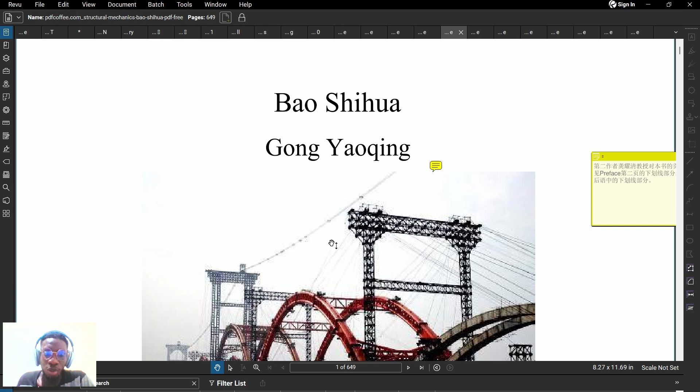Anyway, this is Structural Mechanics by Bao Shihua and Gong Yaoqing, from Wuhan University of Technology. I think this is where COVID originated from, from the Wuhan Labs.

Anyway, not going into these things, they don't concern me. I don't understand Chinese.

This is my first recording of this book. I'm actually planning to record the whole of this book. It's around 649 pages, so I don't know how many days, weeks, months, or years it will take, but who knows?

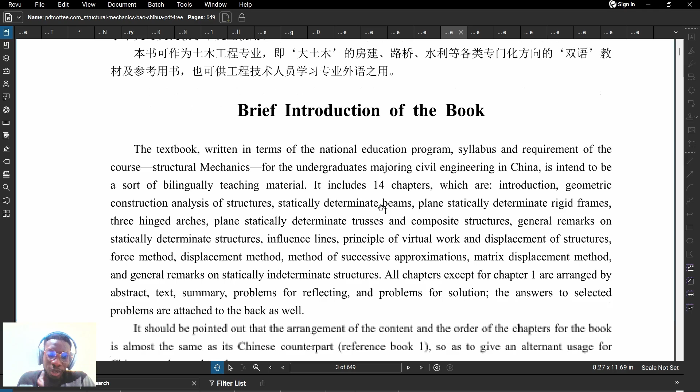I think this will be okay. Now let me read through the text. The book is arranged to include 14 chapters: an introduction, geometrically deterministic structures, statically determinate beams, plane statically determinate rigid frames, three-hinged arches, plane statically determinate trusses and composite structures, general remarks on statically determinate structures, influence lines, principle of virtual work and displacement of structures, force method, Hardy Cross method of successive approximations, matrix displacement method, and general remarks on statically indeterminate structures.

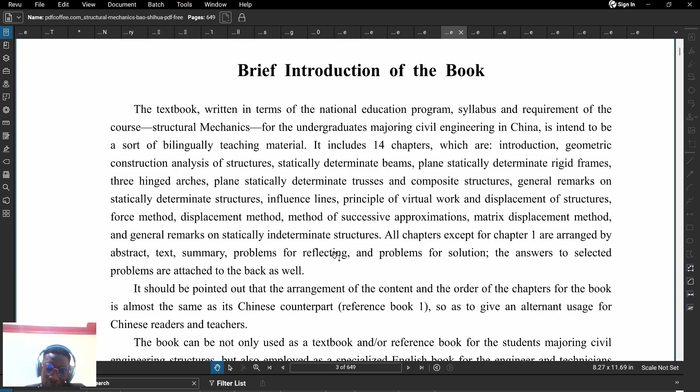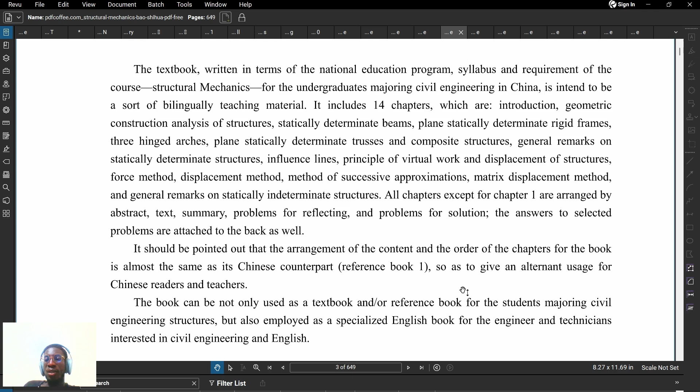Okay, there's another book in Chinese, but this one is for English, of course. I can't read Chinese, so I have to choose English. You may wonder why, of course. Can you read Chinese? No, I can't.

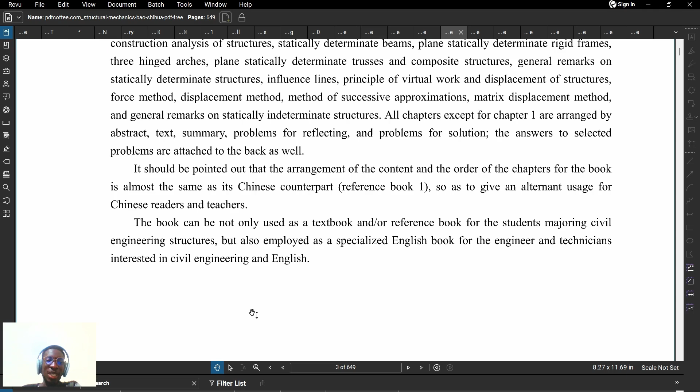So it has to give an alternative usage for Chinese readers and teachers. The book can be used not only as a textbook or reference book for students studying civil structures, but also as a specialized English book for engineering application. Interesting, this guy has written a book to teach Chinese engineers English without them losing time, like you're learning English at the same time as learning structural engineering. Interesting.

So the preface says background: when time reached the 21st century, strong pressures developed from many ranks to write a book of structural mechanics in English for Chinese undergraduates majoring in civil engineering specialty.

The naissance of the book is the result of a request from Wuhan University of Technology Press, a press in China. In recent years, the manner of teaching technical courses in English or partially in English is strongly promoted by the Chinese Ministry of Education.

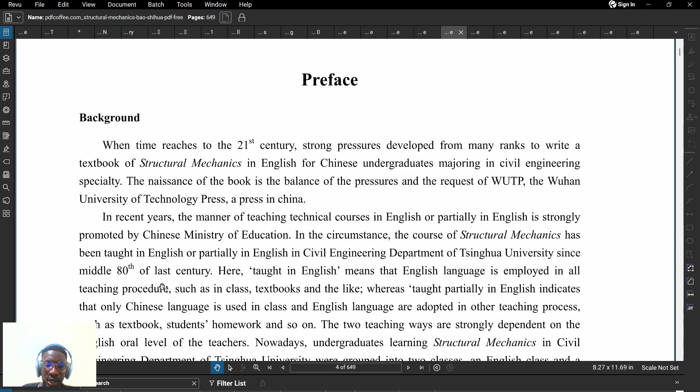In these circumstances, the course of structural mechanics has been taught in English or partially in English in the department at Tsinghua University since the middle 80s of the last century.

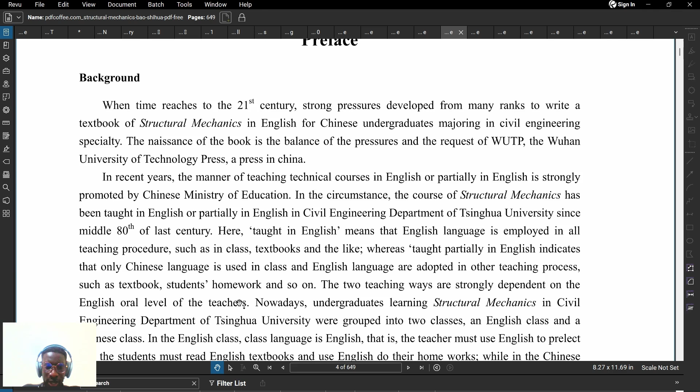Here, taught in English means that English language is employed in all teaching procedures, such as in class, textbooks, and the like. Whereas taught partially in English indicates that Chinese language is used in class, and English language is adopted in other teaching processes such as textbooks, students' homework, and so on.

The two teaching ways are strongly dependent on the English level of the teachers. Nowadays, undergraduates learning structural mechanics in the civil engineering department of Tsinghua University were grouped into two classes, an English class and a Chinese class.

In the English class, the class language is English. That is, the teacher must use English to lecture, the student must read English textbooks and use English for their homework. While in Chinese class, the class language is Chinese. The two teaching ways have been normalized into the teaching plan of Tsinghua University.

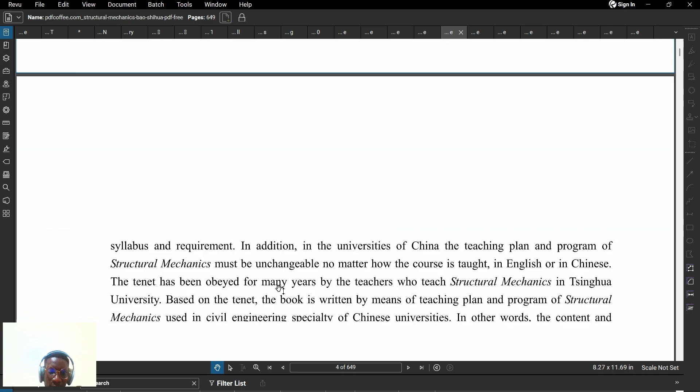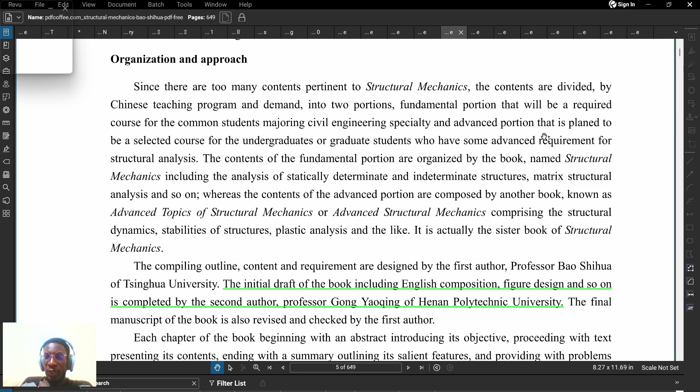So I think I can skip organization, I don't think this is helpful for me, since I'm going to read the whole book from beginning to end. Yeah, that's the commitment. Then how long... that's contract, no. I don't know if you'll still be around by that time. Of course not, today I'm not finishing today. Okay, so let me go to chapter 1. I want to read it from the start to the end.

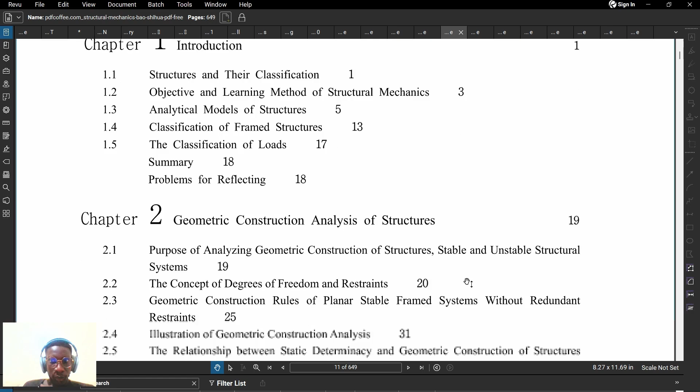Let's take a time, okay. So this is the table of contents.

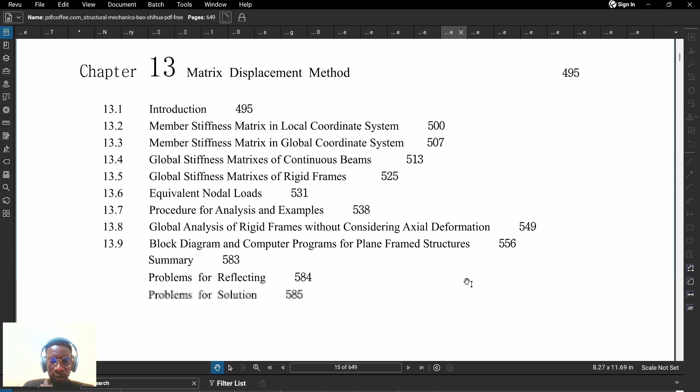Chapter 1, abstract of the chapter. The chapter will introduce 4 questions such as the objective and learning method of structural mechanics, the analytical models of structures, the classification of framed structures and loads. Among the 4 questions, the analytical models are the most significant since they lay the foundation with the other chapters of the book.

Let me get some water. Very thirsty.

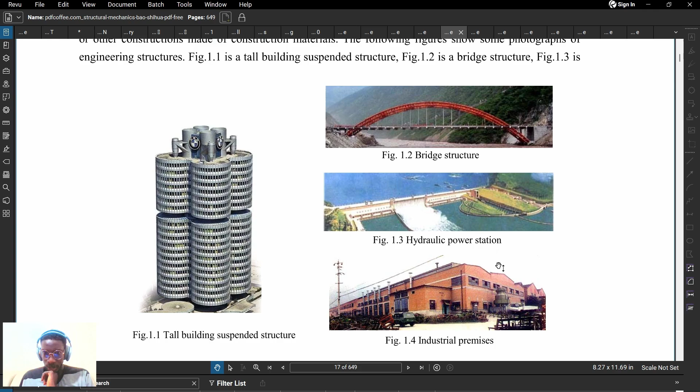Structures and their classifications, okay. These pictures, so tall building suspended structure. Don't know what you mean. Tall building, I know, I work in high-rise buildings. Suspended, I'm not so sure what you are meaning. Bridge, this one I know, bridge structure. Hydraulic power station, yeah, I'm an engineer, electrical to be specific, but I also do mechanical and farming. Industrial premises, this one I never worked in a factory, but this structure, say this chapter.

Structures and their classifications in civil engineering projects. The generic term engineering structure, or briefly named structure, is referred to as a frame or skeleton used to carry loads applied on it. So here they say a structure is referred to as a frame or skeleton if it's used to carry applied loads on it, composed of members of building, other construction materials, performing features and properties of engineering structures.

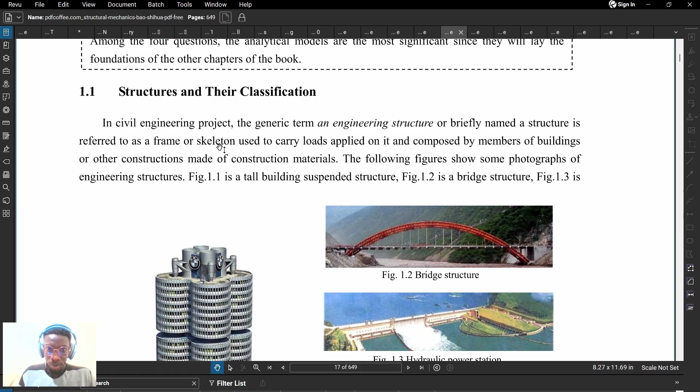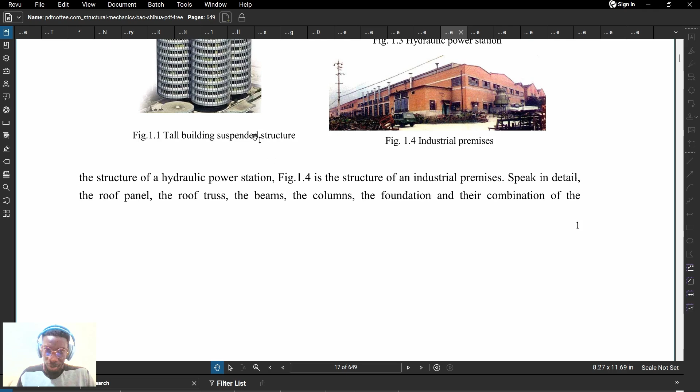A tall building, suspended structure, bridge structure, okay. The structure of a hydraulic power station, figure 1.4. This one is located in industry premises. Speak in detail with the roof panel, roof truss, the beam, the columns, the foundation and their combination, and the combination of one-story workshop with a function of figure 1.8.

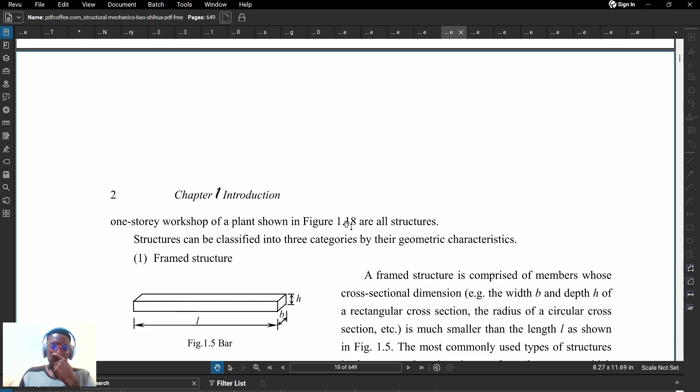Structures can be classified into three categories by their geometric characteristics. What does this mean? If I remember, the definition of structure is just a framework or skeleton, which is used to carry applied loads. It consists of constructions made of construction materials.

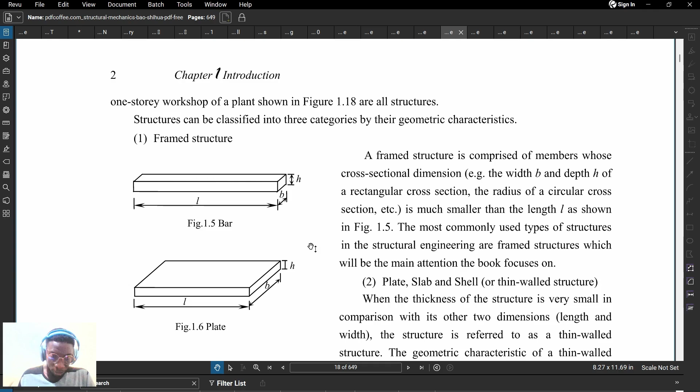So this is a bar, a plate. Okay, a frame structure is composed of members whose cross-sectional dimensions, that is B and depth H of a rectangular cross-section, the radius of cross-section, is much smaller. I think they are taking off from the structure, is much less than the length, as shown in figure 1.5. Okay, so this would be the section, so much less, okay.

So there's some music in the background. My corner, keep quiet, I think you can hear something. Yeah.

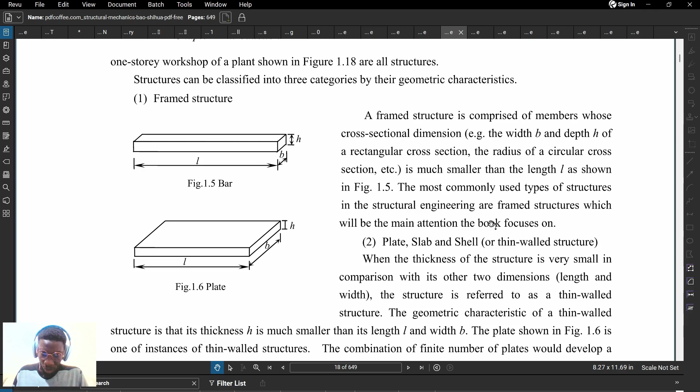So the most commonly used types of structures in structural engineering are frame structures, which remain the main attention, the book focuses on. Okay, two: plate slab and shell, or thin walled structure. Plates, what do we mean by thin wall? When the thickness of the structure is very minimal in comparison to its other two dimensions, length and width, the structure is referred to as a thin walled structure. The geometrical characteristic of the thin walled structure is that its thickness H is much smaller than its length L and width B. Okay, the plate shown in figure 1.6 is one of the instances of thin walled structures.

A combination of a finite number of plates would develop a folded plate, shown in figure 1.7. Folded plate structure, okay.

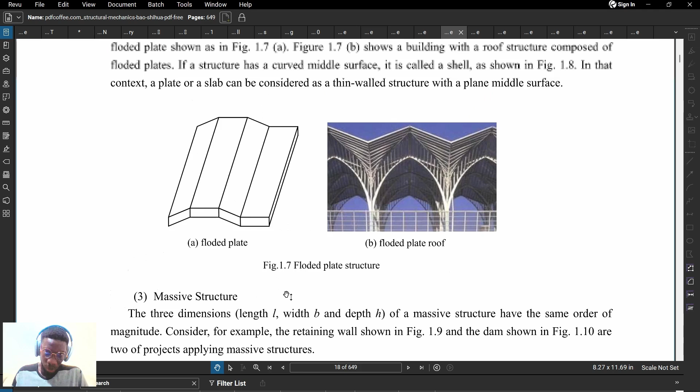If a structure has a curved... figure 1.7, this shows a building with a structure composed of folded plates.

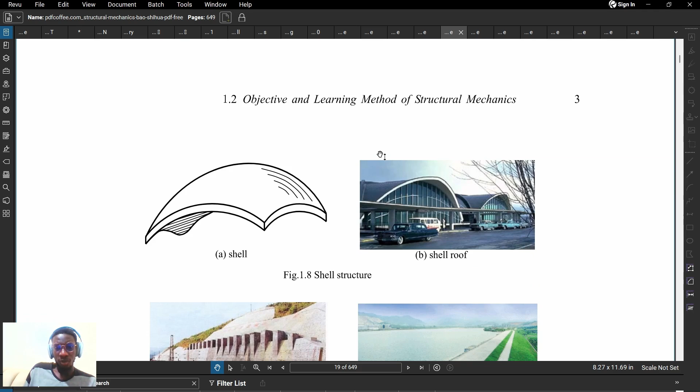If a structure has a curved middle surface, it's called a shell. What do they mean, structure with a curved middle surface? And figure 1.8. Oh, good.

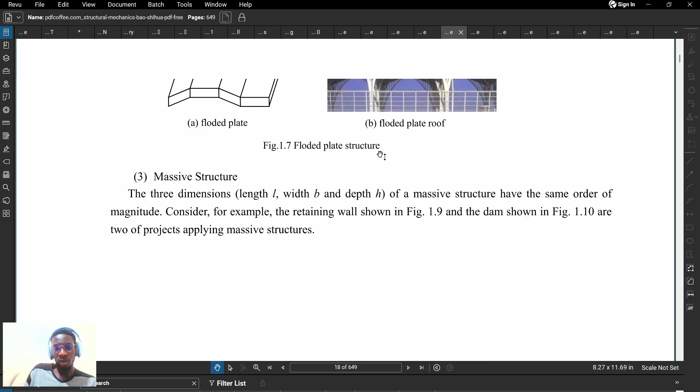In that context, a plate or slab can be considered a thin walled structure with a plane middle surface. Plane, by mean flat.

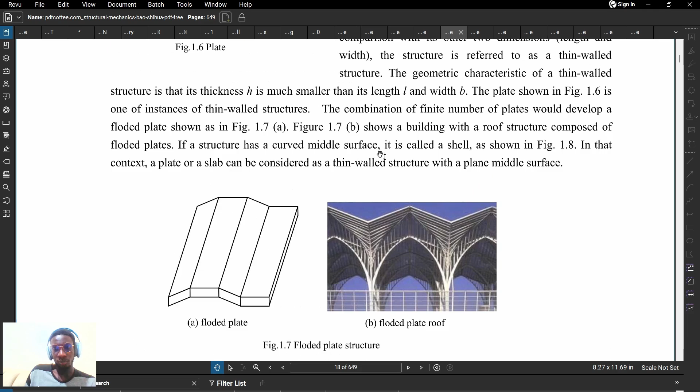Massive structure: the three dimensions, length L, width B, and depth H, of a massive structure have the same order of magnitude. Consider, for example, the retaining wall.

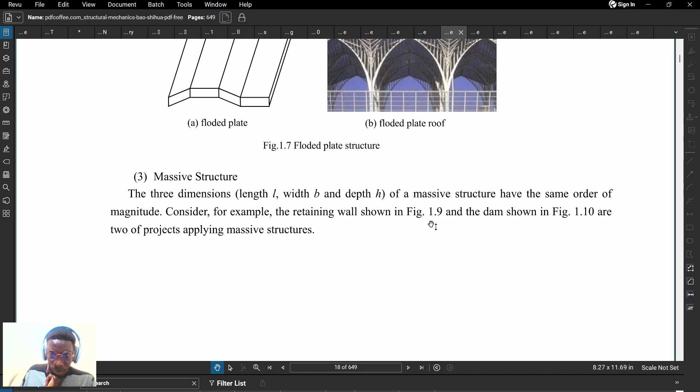Oh, so what I'm understanding, what are you describing? So far we have seen three types of structures. The first is...

The framed structure: the width B and the depth H are very much smaller compared to the length of the overall structure. So that constitutes the beam or framed structure.

Then from that we have plate, or slab, or folded structure. Here, the depth is very much smaller compared to the width and the length. So those are like plate slabs.

Then we have massive structures where all the dimensions are comparable. The author is giving an example of a retaining wall.

But now I have a question. When I'm working, we are constructing a building and we have a raft, the raft foundation. The depth is actually 1 meter, but the length and width are so big.

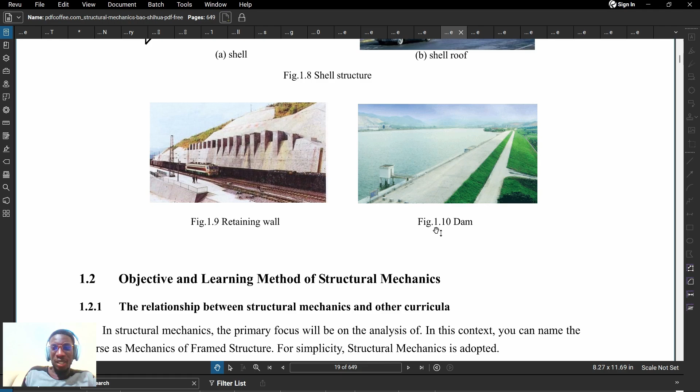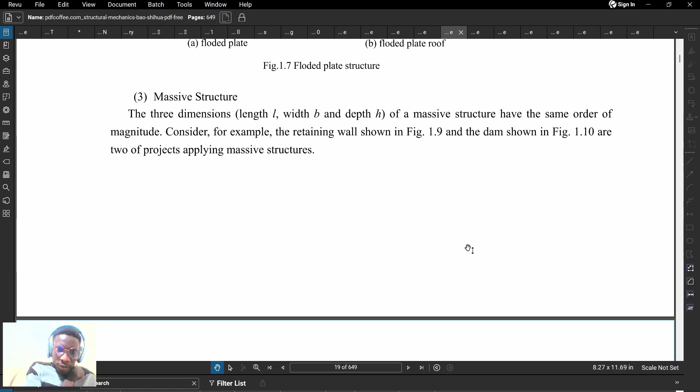Three dimensions, length L, width B, and H for a massive structure are of the same order of magnitude. Consider, for example, the retaining wall.

No, we're going to compare this and that.

Objective learning method for structure mechanics. The relationship between structure mechanics and other curricula in structure mechanics.

Structure mechanics primarily focuses on the analysis of frame structures. So we are going to study mechanics of beams, because a frame structure treated as a beam, where the length is much greater compared to the width and the depth.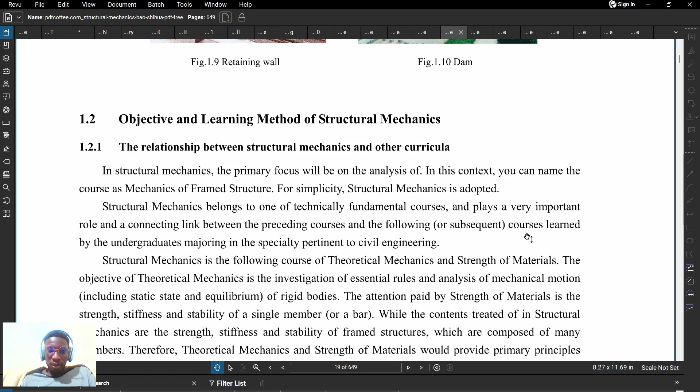For simplicity, Structural Mechanics is adopted. Structure mechanics belongs to the technically fundamental courses and plays a very important role in linking the preceding courses and the subsequent courses learned by undergraduates majoring in civil engineering.

Structure mechanics is the following course of theoretical mechanics and strength of materials. The objective of theoretical mechanics is the investigation of essential rules and analysis of mechanical motion, including static state and equilibrium of rigid bodies.

The attention paid by strength of materials is the strength, stiffness, and stability of a single member or bar.

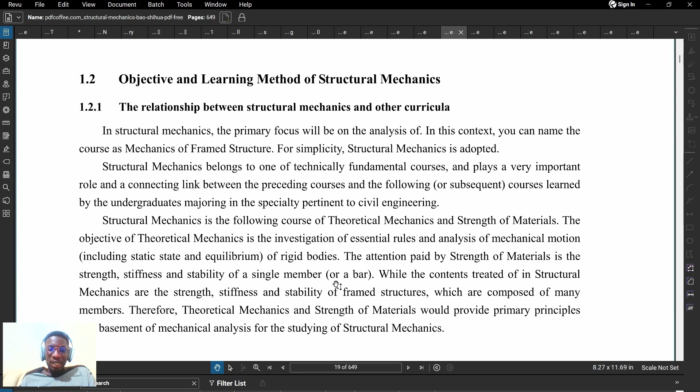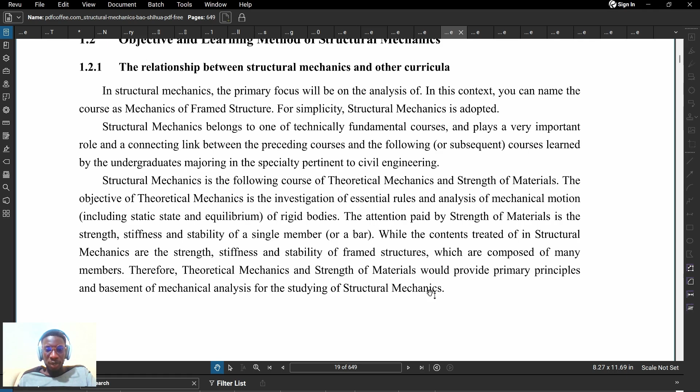While the content treated by structure mechanics is the strength, stiffness, and stability of framed structures, which are composed of many members. Therefore, theoretical mechanics and strength of materials provide the primary principles and basic methods of mechanical analysis for structure mechanics.

Structure mechanics is meanwhile the preceding course for field analysis, focusing on strength, stiffness, and stability of plate, shell, and massive structures—reinforced concrete design, masonry structures, steel structure, and other specialized curricula associated with building construction, structural engineering, highway engineering, bridge engineering, water conservancy engineering, and underground engineering.

By this token, structure mechanics will provide basic mechanical knowledge for studying subsequent courses and play a very important role in the specialty pertinent to civil engineering.

I'm thinking, but I don't think anyone is here by this time. We are 25 minutes in, but if you are, I think that is interesting. I'm thinking maybe I don't have the courage to read aloud. Just giving sincere thought to what else I say, but not everything, because I know if you are here this long, then definitely you can write.

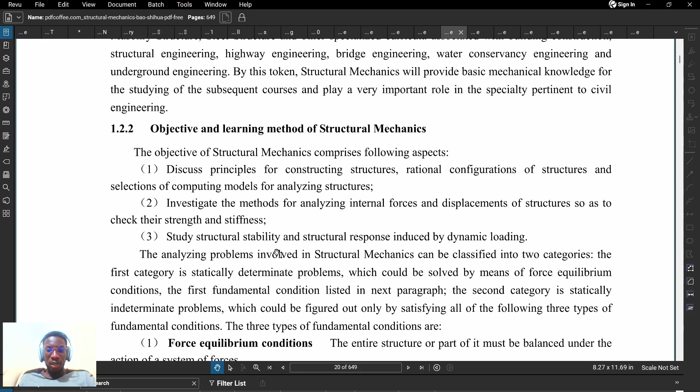The analyzing problems involving structure mechanics can be classified into two categories. The first category is statically determinate problems, which will be solved by means of equilibrium conditions.

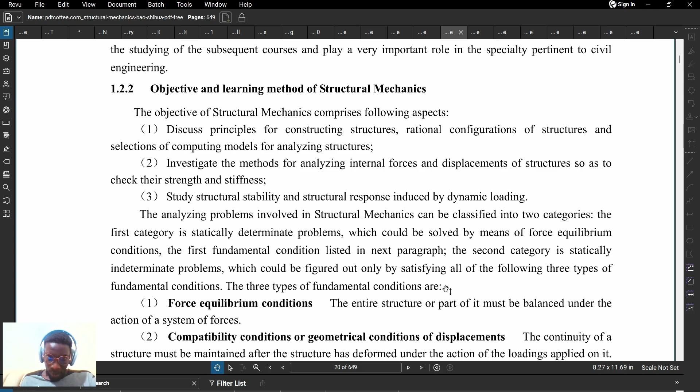The second category is statically indeterminate problems, which will be figured out only by satisfying all of the three types of fundamental conditions. The three types are: first, force equilibrium conditions—the entire structure or part of it must be balanced under the action of a system of forces. Does it make sense?

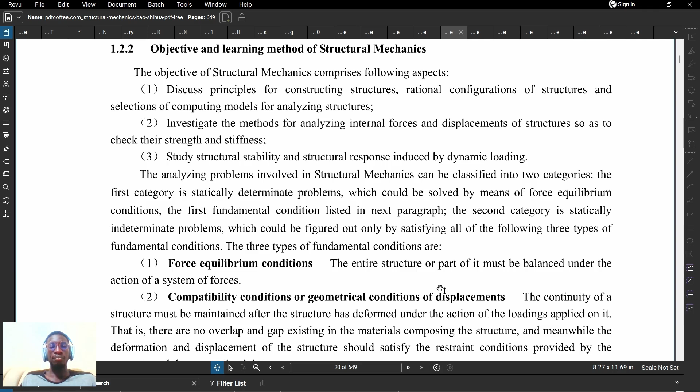Compatibility conditions or geometrical conditions of displacements. The continuity of a structure must be maintained after the structure has deformed.

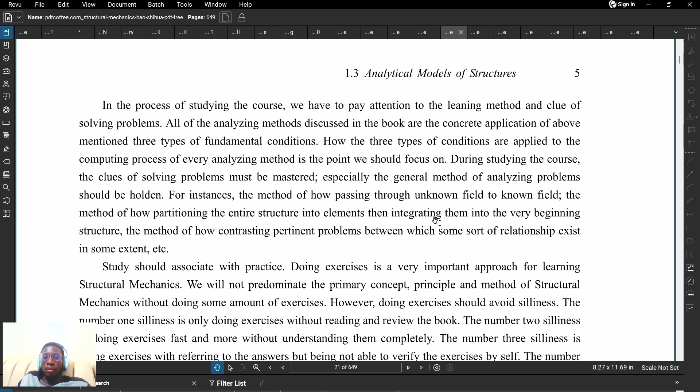Study should associate with practice. Doing exercise is a very important approach for learning structure mechanics.

We will not predominate the primary concept, principle, and method of structure mechanics without doing some amount of exercise.

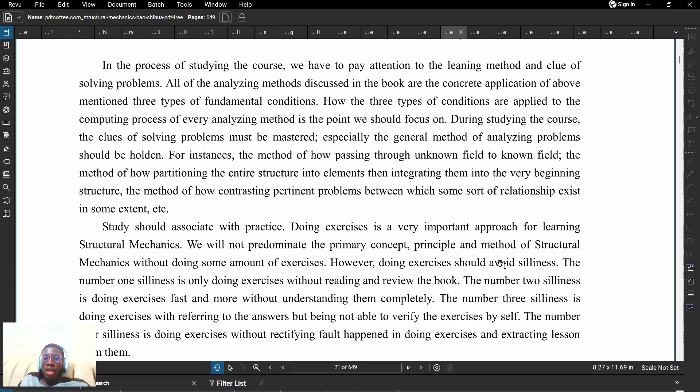However, doing exercise should avoid silliness. This is why I went back to read the whole paragraph because of the word silliness. The number one silliness is when we do exercises without reading and reviewing the book.

The number two silliness is doing exercises fast, without understanding them completely. Number three silliness is doing exercises by referring to the answers but not being able to verify them by oneself. Number four silliness is doing exercises without rectifying fault patterns. This is an instructive method.

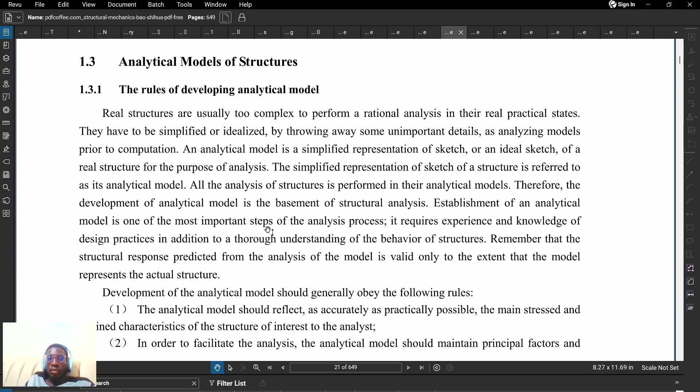So here they are saying real structures are too complex to perform rational analysis in their real practical states. They have to be simplified or idealized by throwing away some unimportant details, leading to models prior to computation. An analytical model is a simplified representation, or an idealized sketch, of a real structure for the purpose of analysis.

All analysis of structures is performed on analytical models. Therefore, the development of an analytical model is the basis of structure analysis. Establishment of an analytical model is one of the most important steps of the analysis process.

It requires experience and knowledge of design practices, in addition to a thorough understanding of the behavior of structures. Remember that the structural response predicted from analysis of a model is valid only to the extent that the model represents the actual structure.

Analytical models should reflect as accurately as practically possible the main stressed and strained characteristics of the structure of interest to the analyst. Okay, the analytical model should - how would we call it?

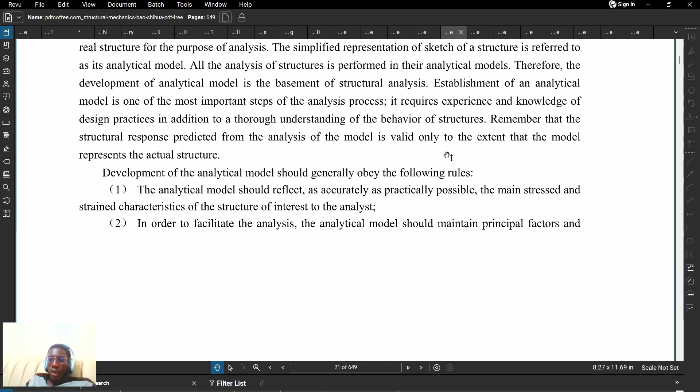In order to facilitate the analysis, the analytical model should maintain principal factors and discard much of the detail about the main structure.

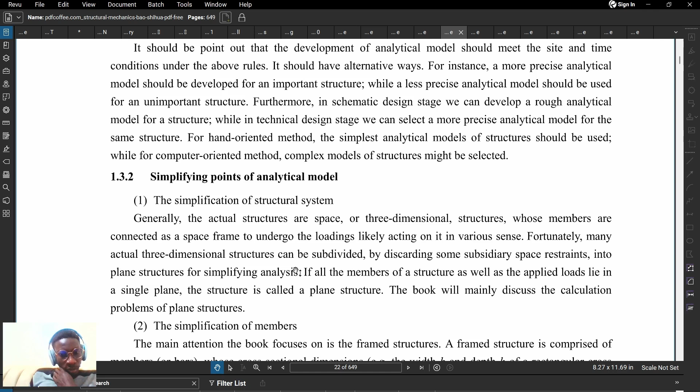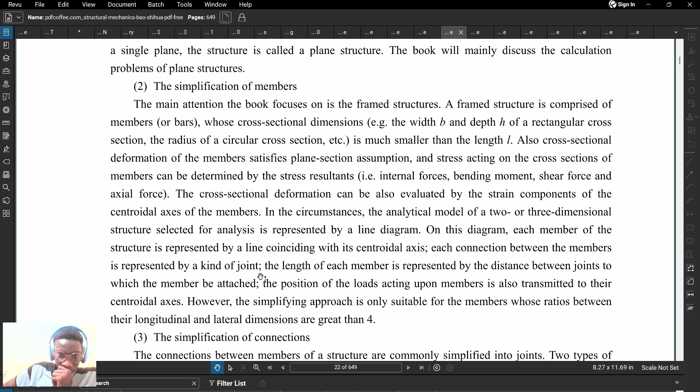Okay, there's some misinformation being shared here. So it's saying...

The cross-sectional deformation can also be evaluated by the strain components of the centroidal axis of the members. In the circumstances, the model of a 2 or 3-dimensional structure selected for analysis is represented by a line diagram. On this diagram...

Each member of the structure is represented by a line coinciding with its centroidal axis. Each connection between the members is represented by a kind of joint. The length of each member is represented by the distance between the two joints to which the member is attached. The position of the loads acting upon them is also transmitted to their centroidal axis.

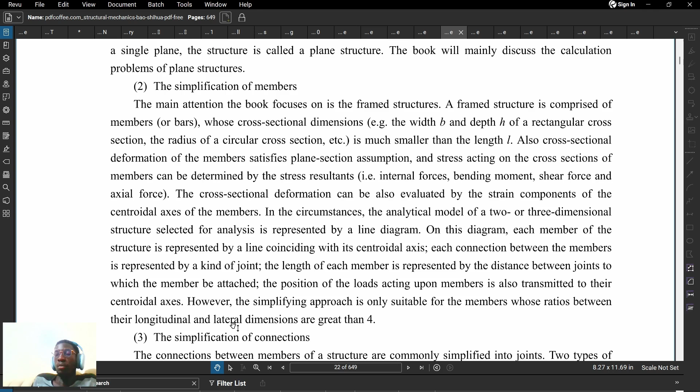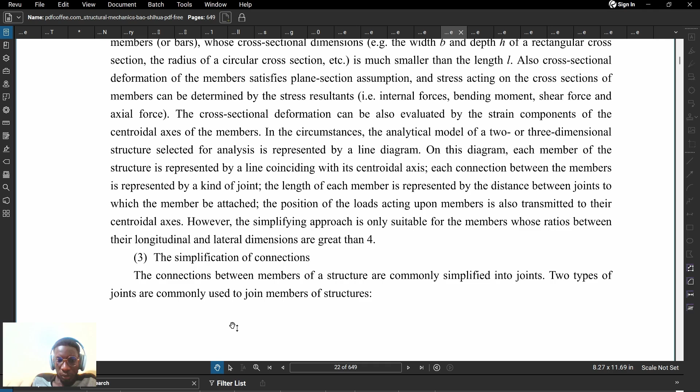So we have two types of joint. We have rigid and hinged, or flexible. There's another one, pin. Yes, there's also pin, there's also roller. But here they're saying the two main ones are actually flexible. Oh, I think pin is the same as hinged. Yeah, so there are three: pin, hinged, or flexible - that's one - then rigid, and then roller.

So here it's saying a hinged joint prevents relative translations of the member ends connected to it. That is, all member ends connected to this joint have the same translations, but may have different rotations.

Translation is like... I think turning on its own axis. No, actually translation is moving from one place to another. Yeah, rotation is just turning on your own axis - remain in the same place, but you turn. Yeah.

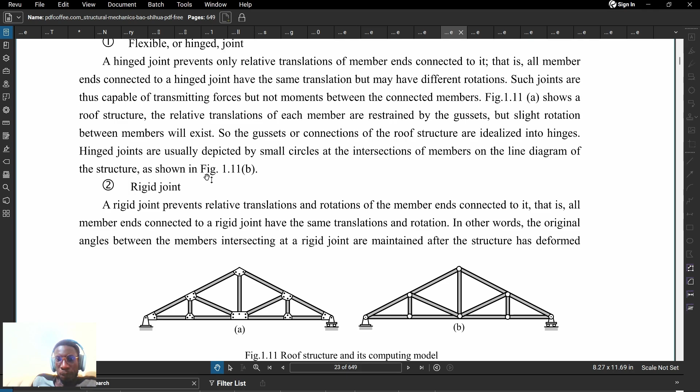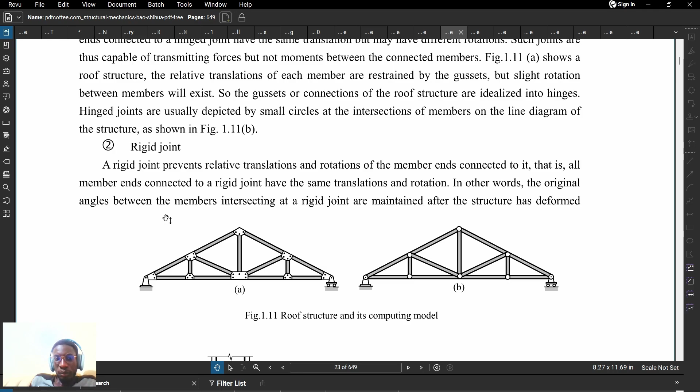For rigid joints, it prevents relative translation and rotation of the member ends connected to it. That is, all member ends connected to a rigid joint have the same translations and rotations.

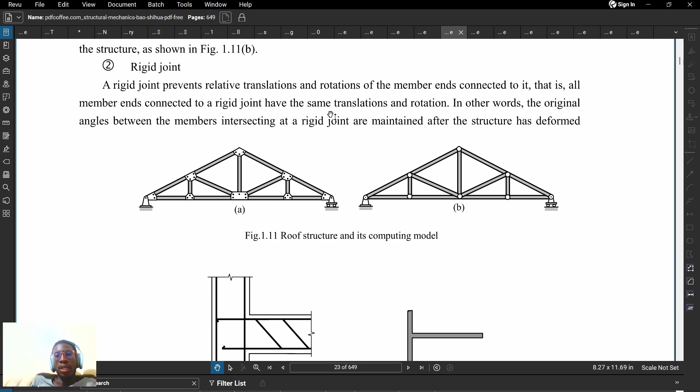In other words, the original angles between the members intersecting at a rigid joint are maintained.

So they say, figure 1.12 shows the connection of a reinforced concrete side column and beam.

The relative translation and rotation of the beam, column and beam are restricted by the arrangement of reinforcements which are cast into the whole body.

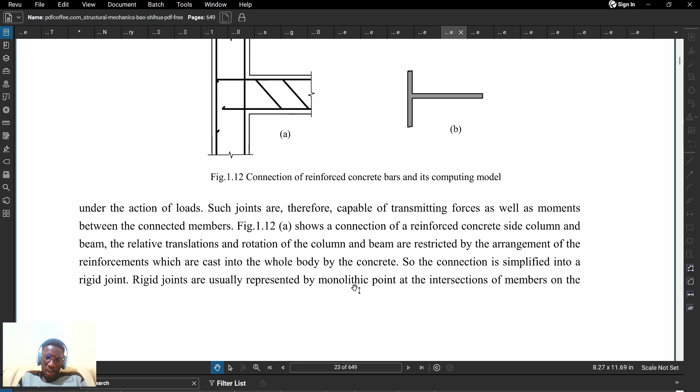By the concrete, so the connection is simplified into a rigid joint. Rigid joints are usually represented by monolithic points at the intersections of members.